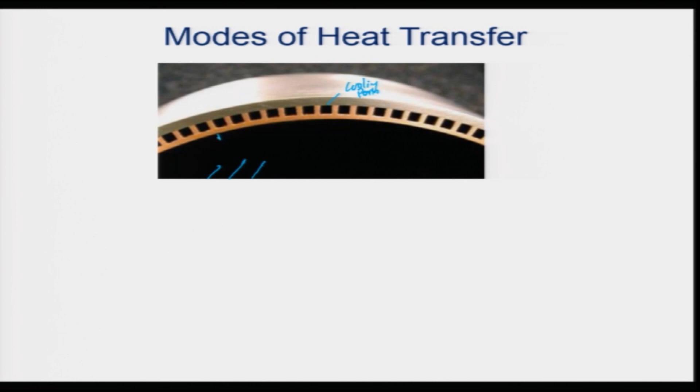Let us consider the diagram shown here. In this case, I have taken a cross sectional view of a combustor with cooling ports. These are cooling ports. They can be square shaped or other shapes, with different aspect ratios that we had seen earlier. Now, this is the side through which the hot gases will be passing. This is your hot side, and outside is your cold side or ambient temperature.

And this is your outer wall, and this is the hot side gas wall, you can say. When these hot gases are moving at a high velocity and a high pressure, there will be heat transfer from this hot gas to the inner side of the hot side gas wall of the combustor or the nozzle. There will be heat transfer due to convection.

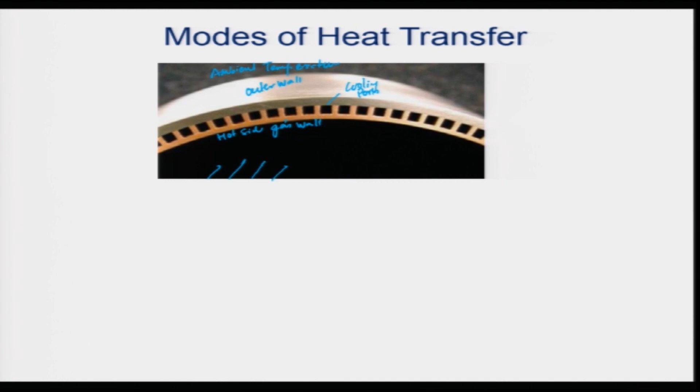Between the boundary layer and wall interface, there will be of course conduction, that is molecular conduction of heat transfer, and in the wall itself there will be heat conduction. Then there is convection and also radiation from the combustion gases, which take place simultaneously inside the combustion chamber and also inside the nozzle.

The propellant can be either solid or liquid, but it may contain particulates, both solids or droplets. Therefore, being at very high temperature, they will be radiating heat to the wall, and the wall will also be re-radiating. And the flow will be turbulent in nature and it will be complex.

Besides this, as I told, there will be heat conduction in the wall, and the coolant will be moving at a certain velocity across it. This is your coolant velocity Vc, and this is your gas velocity Vg. As a result, the heat passing by conduction through this wall will be carried away, and it can be reutilized, being a regenerative cooling system.

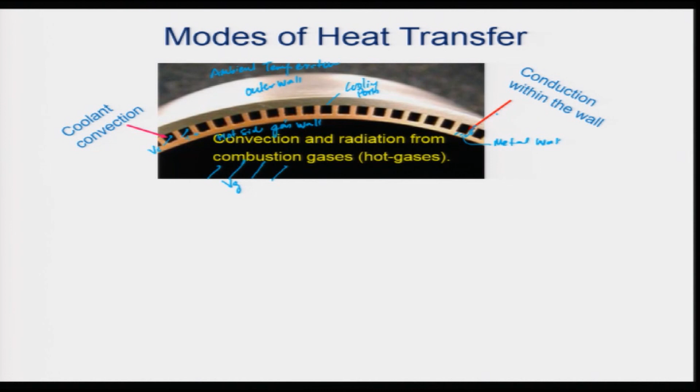And besides this there will be heat conduction, as I told, within the wall, the metal wall, and heat will be transferred to this portion also. So all three modes of heat transfer occur simultaneously in the typical rocket engine combustion chamber and also in the nozzle.

Hence, it can be considered as a conjugate heat transfer problem. That means all these equations have to be solved. As I told earlier, the flow will be turbulent in nature, and we have to consider the complex flow structures. There might be two phase flows, sometimes even three phase flow. So it is very complex to analyze, and the flow will be three dimensional in nature.

However, for simplification and to carry out some kind of design analysis, we can consider the flow to be very simple and one dimensional in nature. Keep in mind, in the actual combustor and nozzle, the flow will be unsteady to some extent. However, for our analysis, we will consider the flow to be steady and one dimensional, and this is your wall.

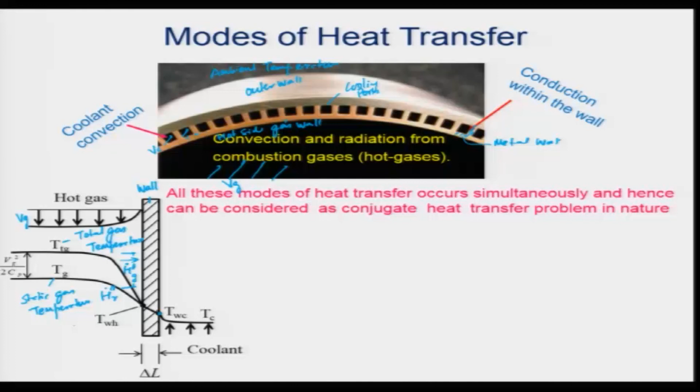There is the heat transfer due to convection passing through, and there might also be heat flux due to radiation. That means both convective and radiative heat transfer take place in this hot gas region, and it has to pass through the wall under steady state condition.

So, by considering one dimensional steady flow, which may not be true, to have a simple treatment, we can determine the convective heat flux q dot g as hg times (Twa minus Twh). Keep in mind that Twh is your hot wall temperature, and Twa is your adiabatic wall temperature.

That means there is no coolant, no heat being transferred; it is insulated properly. This wall, if you look at it, is insulated properly, with insulation such that H dot total is equal to 0. Then the wall will be attaining the adiabatic wall temperature, and this is the condition of adiabatic wall. That means heat transfer through the wall will be 0, and Hg is your convective heat transfer coefficient.

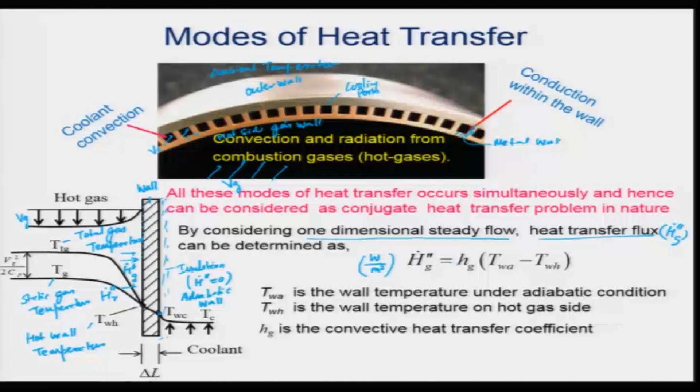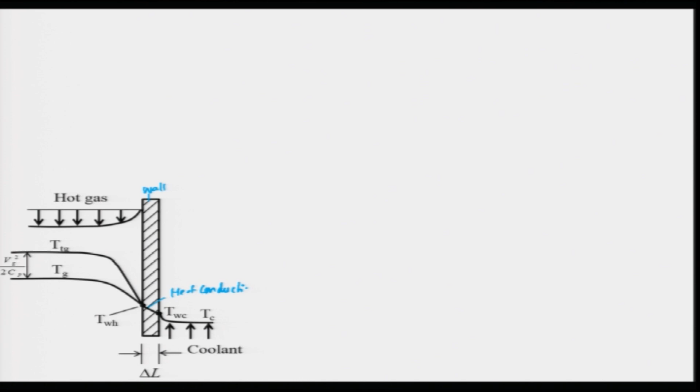So let us look now at what we are considering, one dimensional steady heat transfer problems. As I told, there will be heat transfer by convection from the hot gas to the wall, and through the wall there will be conduction. This is only heat conduction along the thickness of the wall. This is your wall, and this of course will be convection, and on the hot side there will be radiation as well, apart from the convective heat transfer in the hot gas.

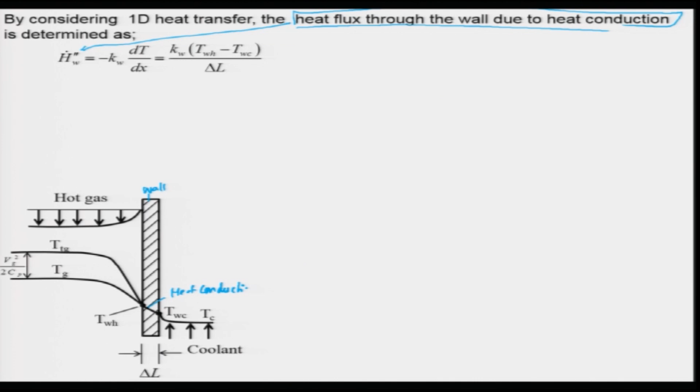So, by considering one dimensional heat transfer, the heat flux through the wall due to heat conduction, H dot W, is nothing but minus KW dT/dx. KW is the thermal conductivity of the wall. The gradient has to be obtained from a very rigorous analysis, but we are considering it to be linear in nature, so it is KW (TWH minus TWC) divided by delta L, as we are considering it to be one dimensional. However, in a real situation it will be at least two or three dimensional in nature.

TWH is the hot side wall temperature, and TWC is the cold side wall temperature, and delta L is your wall thickness. The heat flux due to hot gas side convection, as we had already done, is H double dash G equal to HG (TWA minus TWH). HG is the hot gas convective coefficient, and similarly there will be convection going on in the coolant.

The coolant will be carrying the heat coming through the wall due to heat conduction, and we can evaluate the heat flux due to heat convection in the coolant passage: H double dash C is equal to HC (TWC minus TC), where TWC is the coolant side wall temperature and TC is the coolant temperature.

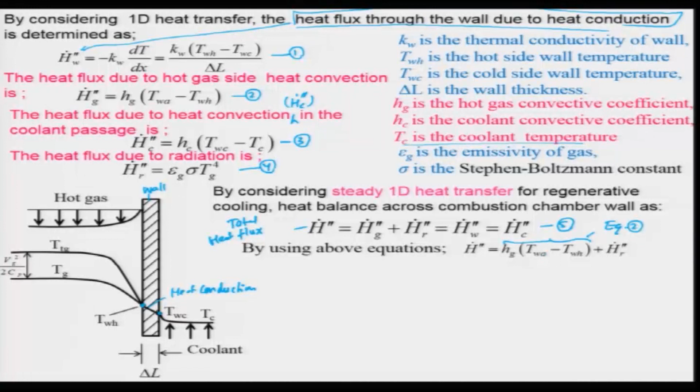By using the above equation, we can get basically H double dash is equal to H G (T W A minus T W H). This I am taking from equation 2, and this is your H double dash R, and I can use equation 4 for that. But now we have to relate this T W A to T G, and T W H we have to relate to the coolant, and let us do that. So, by using equations 1 and 2 along with equation 5,

we can get T W H. If I look at this equation itself, T W H is equal to H double dash W times delta L by K W plus T W C. So, this is the expression we get from equation 1. Now, we can use equation 3 and relate T W C: T W C is equal to H double dash C divided by H C plus T C, and that we can use.

And keep in mind that H dot double dash W is nothing but H dot double dash by using equation 5. So, when you put all this together, I am getting an expression for T W H in terms of T C, if I know the total heat flux. Now, let us say this is 6 and this is 7; by using equations 6 and 7, I can get an expression. Let us do this.

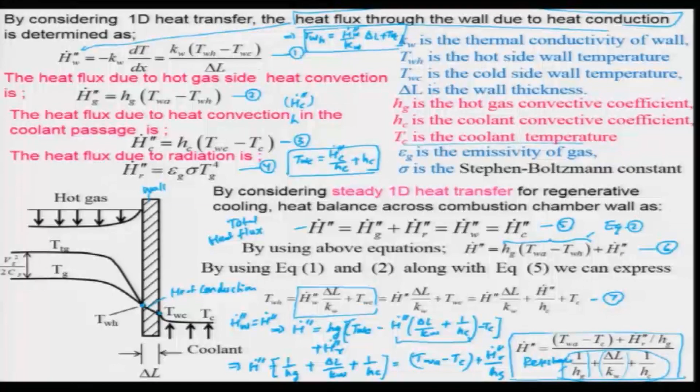And this is a very important expression you should keep in mind, and you can solve problems using this, provided I know the heat flux, or if I do not know the heat flux, I need to know all other parameters so that I can evaluate easily. With this, we will stop, and in the next lecture we will use this expression, equation 8, and also see how we can apply it for practical things where one dimensionality or the area has to be considered in this analysis.